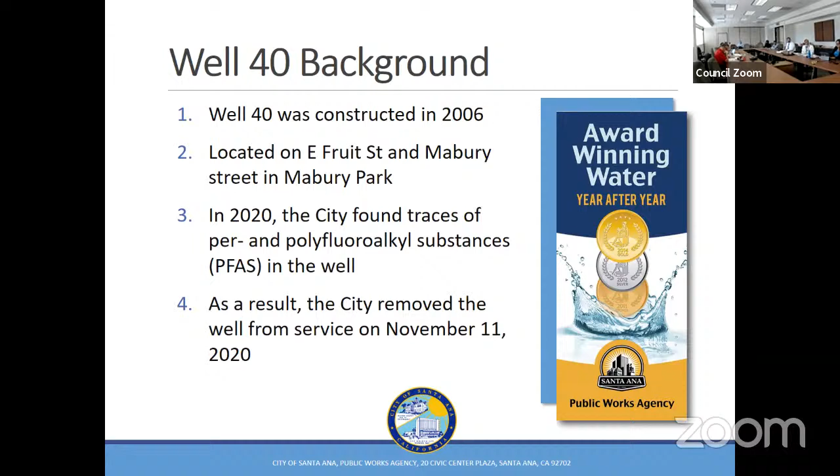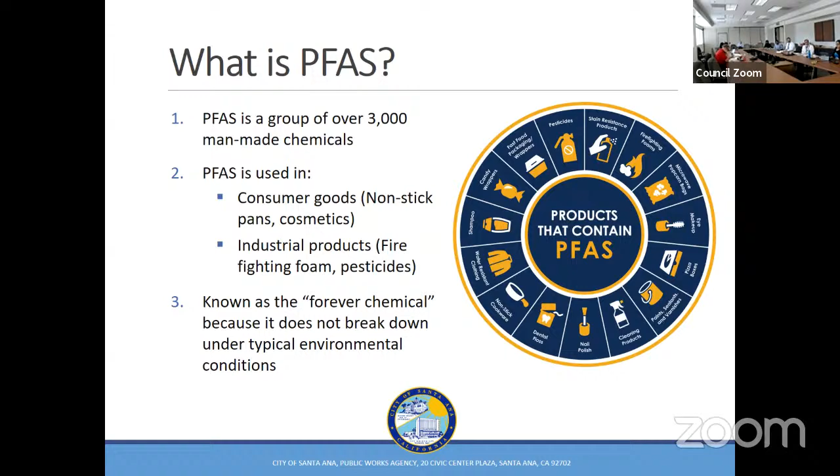So what is PFAS? PFAS is a group of over 3,000 man-made chemicals. It's often used in consumer goods like nonstick pans and cosmetics. There are also industrial products that contain PFAS, like firefighting foam and pesticides. PFAS is known as the forever chemical because it does not break down under typical environmental conditions.

Well 40 PFAS findings: the city has been reliant on imported water to feed the upper zone well where Well 40 is located. Because we took Well 40 offline, we still have to provide water to the people, and so our imported water sources in that zone, specifically MWD connection SA6, is being used to feed that zone. The city is collaborating with Orange County Water District to remove PFAS from the well by designing and constructing a wellhead treatment facility. Construction for this facility has commenced in May.

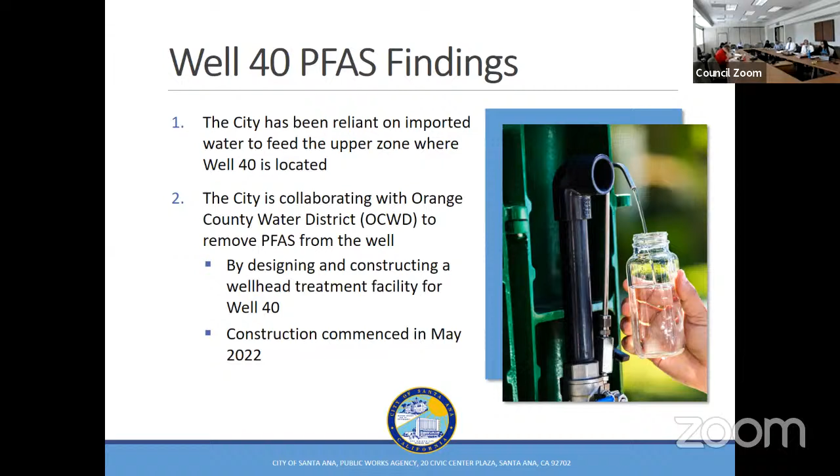Here is the construction schedule currently in place. Our design was completed in 2021. An award for the project was received in February, and so we began construction in May, and we hope to complete the project by December 2022 or February 2023 at the latest. The total cost, which will be funded entirely by OCWD, is $3.4 million.

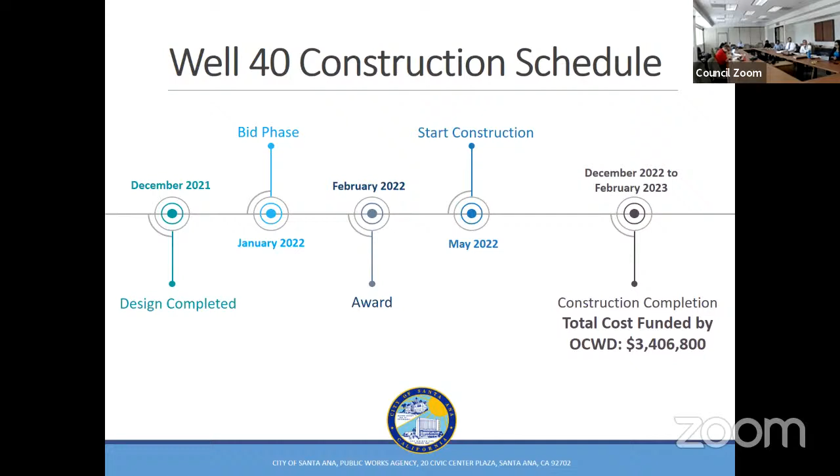So the treatment facility construction - what are we doing to get rid of PFAS in the water? We will be utilizing a state-of-the-art ion exchange system to remove the PFAS from the water. In addition, we will also be increasing site security, improving the lighting at the park, and installing surveillance cameras, as well as a perimeter wall and a gated entrance. We will also be including community outreach and educational opportunities, utilizing collaborative efforts between the Water Resources Division and Parks and Recreation.

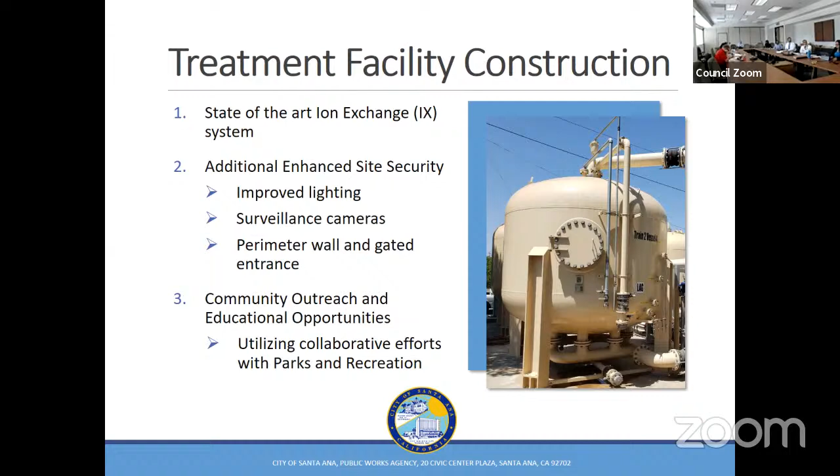So what are the benefits of the treatment facility? We will not only be removing PFAS, but potentially all constituents of concern - long chain PFAS, short chain PFAS, PFOA, PFOS, and so on. In addition, we will prevent reliance on imported water, thus saving on costs for consumers. OCWD will pay 100% of the capital costs for construction of the facility, will be instrumental in providing community outreach, environmental review, and construction, and will also be supplying 50% of the cost of operation and maintenance for the facility for 30 years.

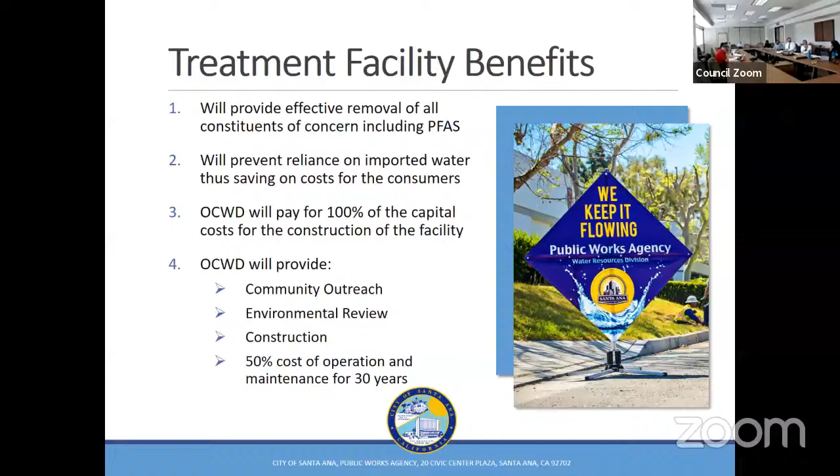This is the general location of the site, in Mabury Park. This shows a closer view of Well 40 and where it currently is. At the top, right next to the parking stalls, is where we will be installing the PFAS treatment facility.

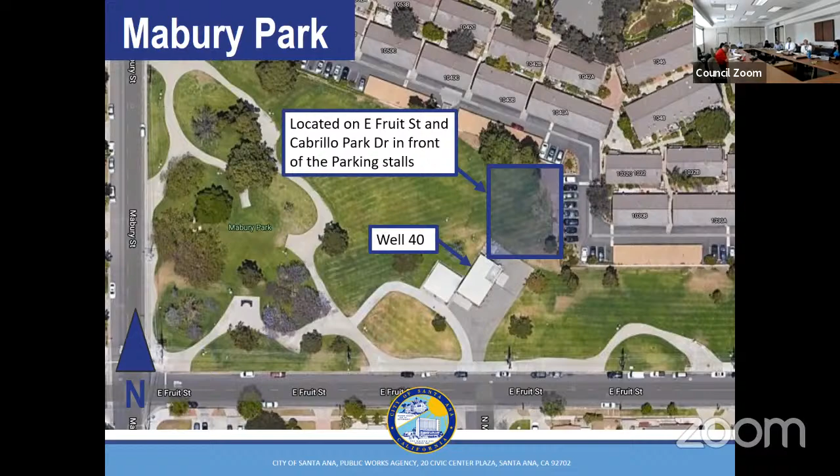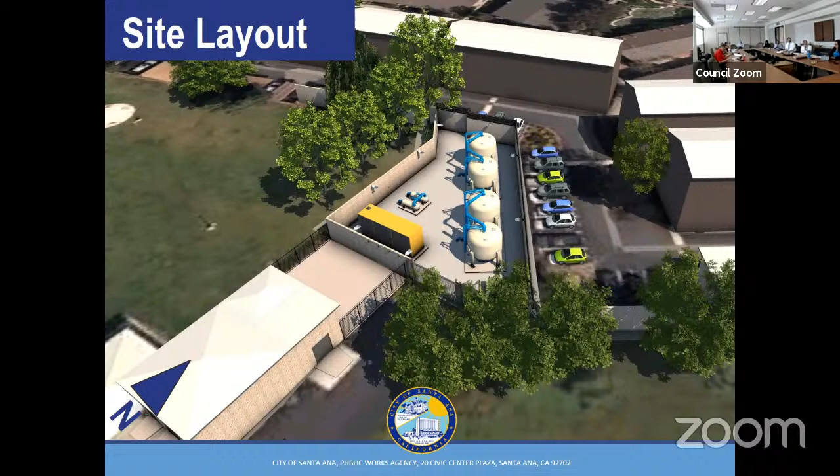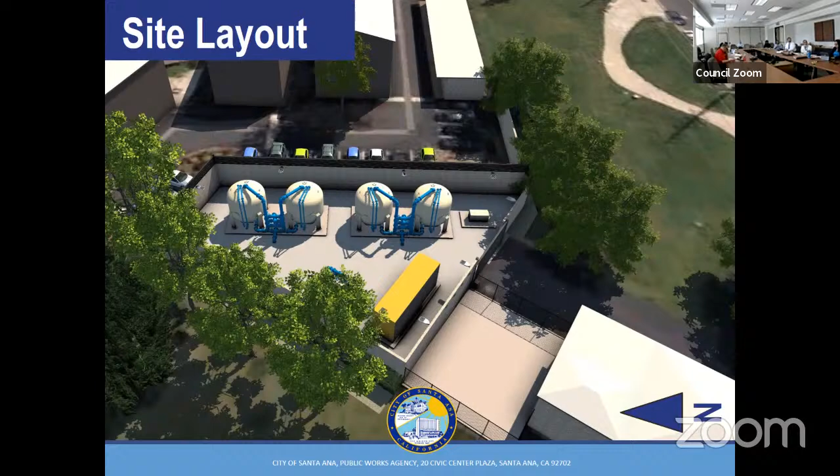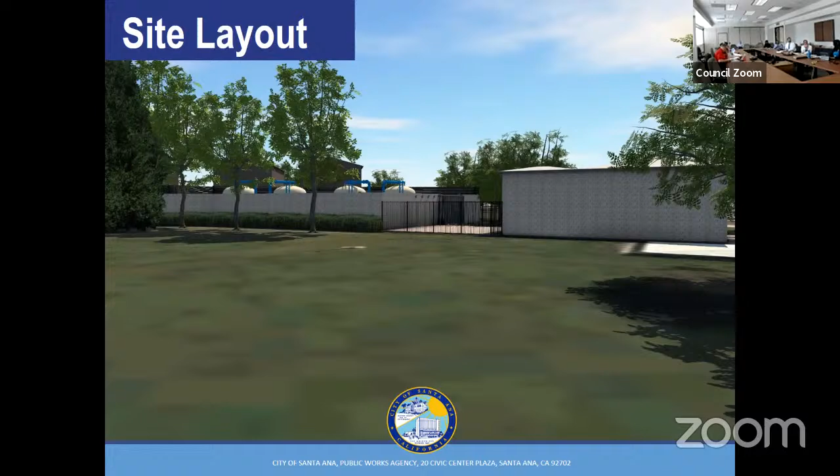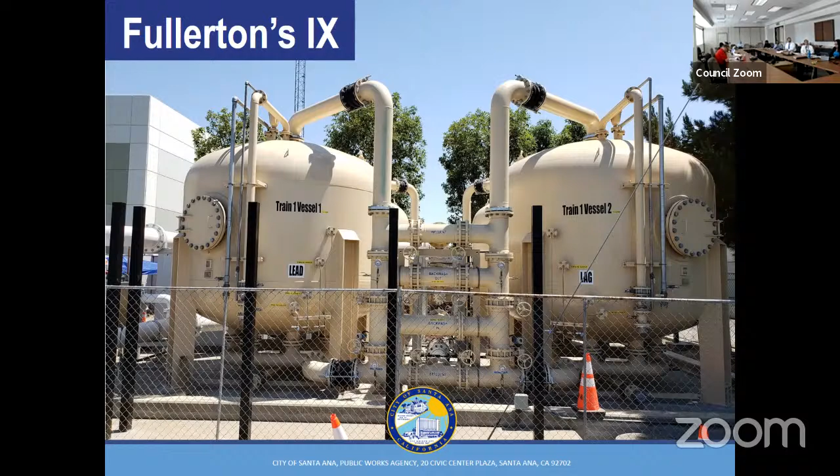That concludes the presentation. I would like to open it up for any questions, if we have any.

This is Commissioner Benninger. On the last picture, I find it very interesting that they used the word 'lead' talking about the import. It's lead. Pardon? It's lead, it's lead. I read that as lead, I'm sorry - that's my Polish background, thank you. Yeah, so one of the tanks serves as a lead and then the other one serves as a lag.

What is the life of one of these tanks? How long does it take to contaminate? As far as ion exchange, this is new to us - the first one in Orange County is the Fullerton one that is installed. What we're hearing right now is about 9 months before we have to change the resin on these vessels, until they reach breakthrough, that's when we have to replace it. But we don't have that expertise yet, or clear knowledge of how long it's going to take, because it depends on volume too - how much volume you move from the water that you pump, and also the water quality you might have at this particular site.

Next question is, how do they believe the contamination got into the water table? How did the contamination get into the water table?

Correct, well, it's percolation. So those industries that are the contaminant sources, one of them is 3M, in the upper riverside area, dump into the river, and those waters percolate until they made it to a basin here in Orange County. That's the information we have on how these chemicals got into our system.

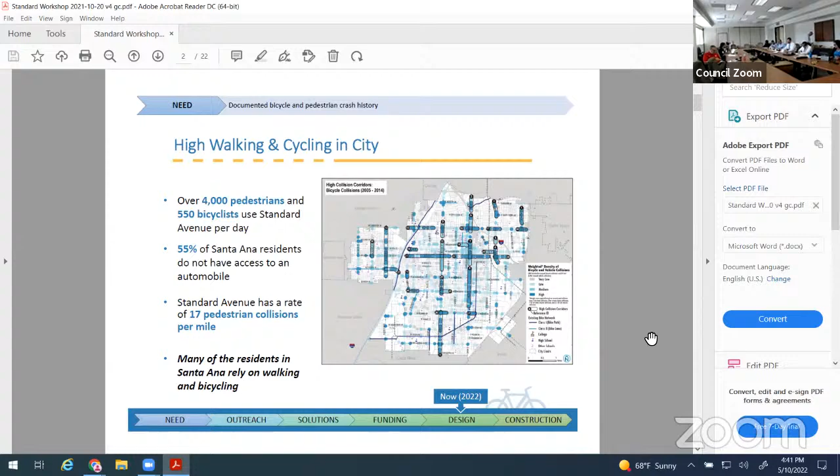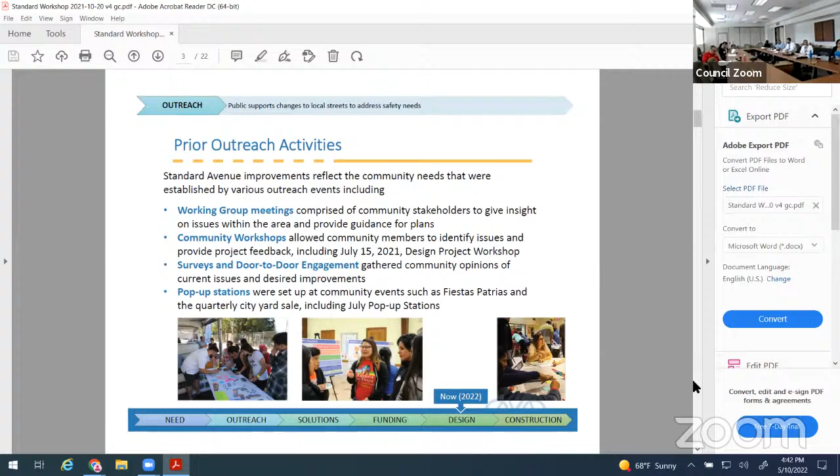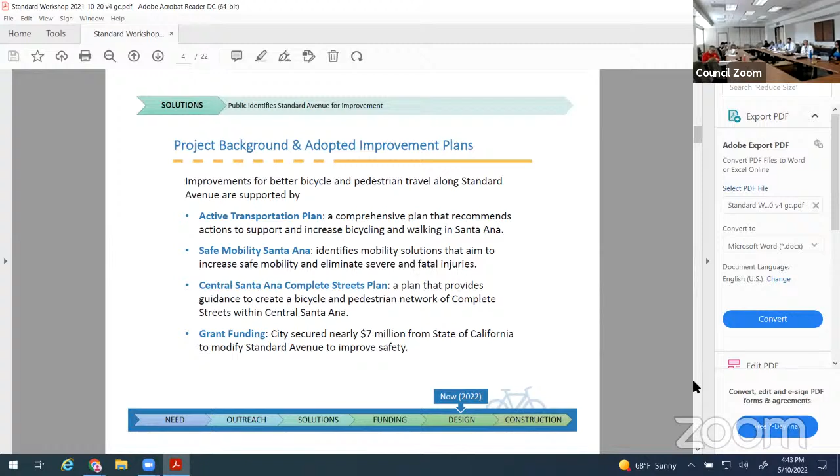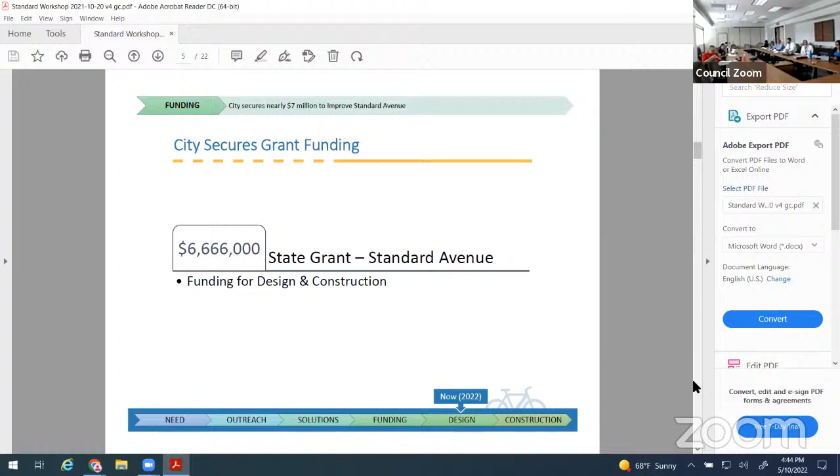The city secured $6.6 million in funding for the design and construction of this project.

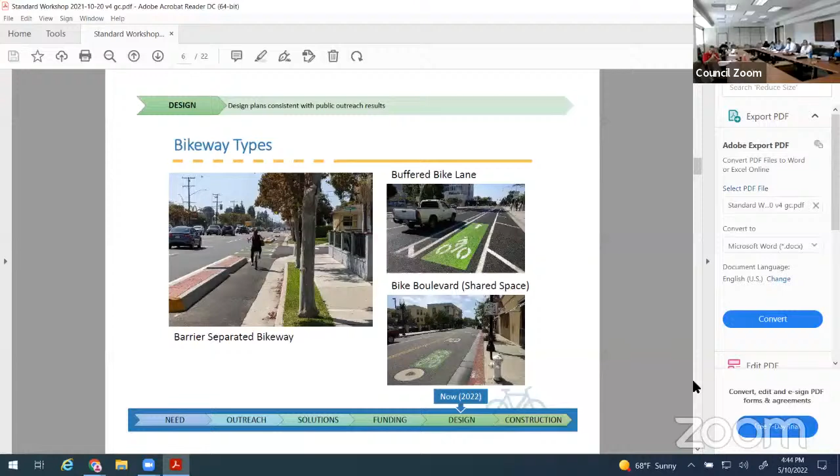I'm going to identify three bikeway types that we will be using on Standard Avenue. The first one on the left is our barrier-separated bikeway. The top one is a buffered bike lane, and the third one is a bike boulevard, which we call the shared space.

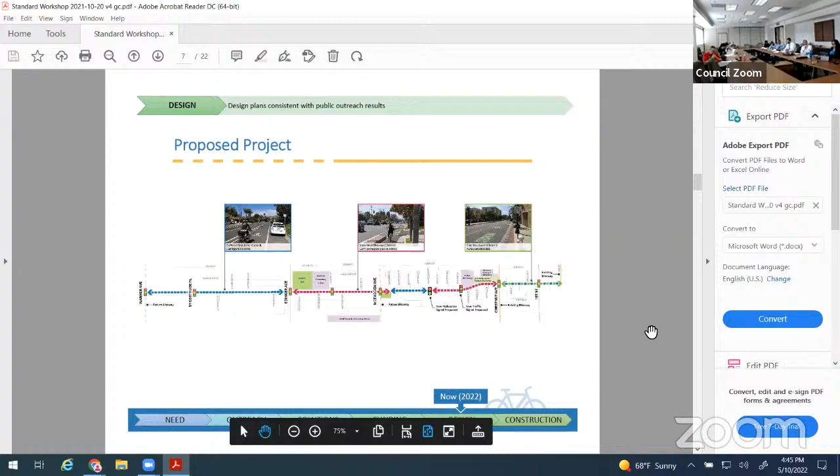The proposed project limits on Standard Avenue are from Warner to 3rd Street. The blue line shows our buffered bike lane from Warner to Edinger, and from Edinger to McFadden we'll have a barrier separating the cars from bicyclists. Between McFadden and Wakeham, we'll go back to the buffer bike lane, and from Wakeham to Chestnut, we'll go with the barrier-separated area. North of Chestnut to 3rd Street will be our bike boulevard, which we call a shared lane.

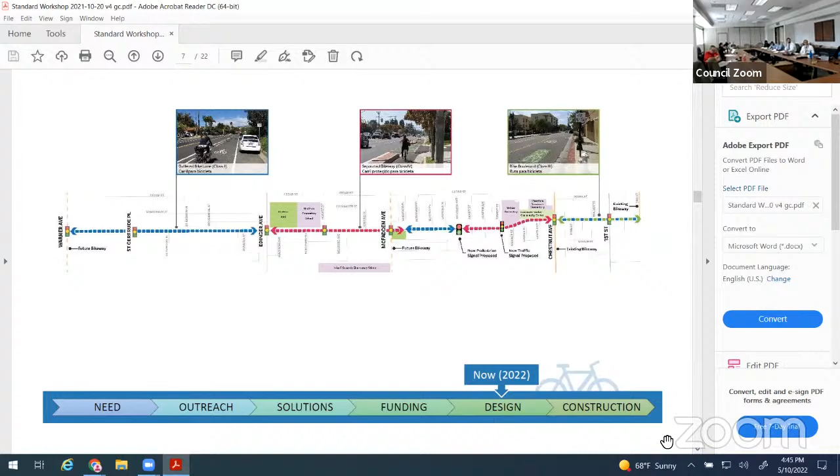Standard Avenue from Warner Avenue to Edinger - we have a rendering from our consultant showing the existing condition on Standard Avenue from Warner to Edinger.

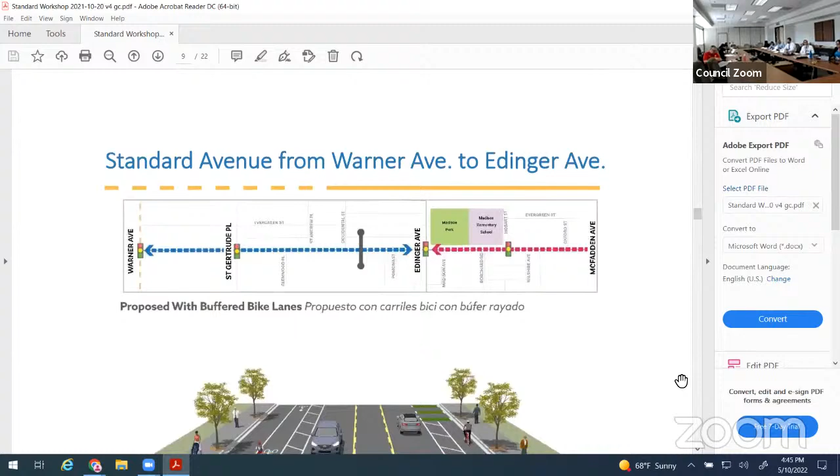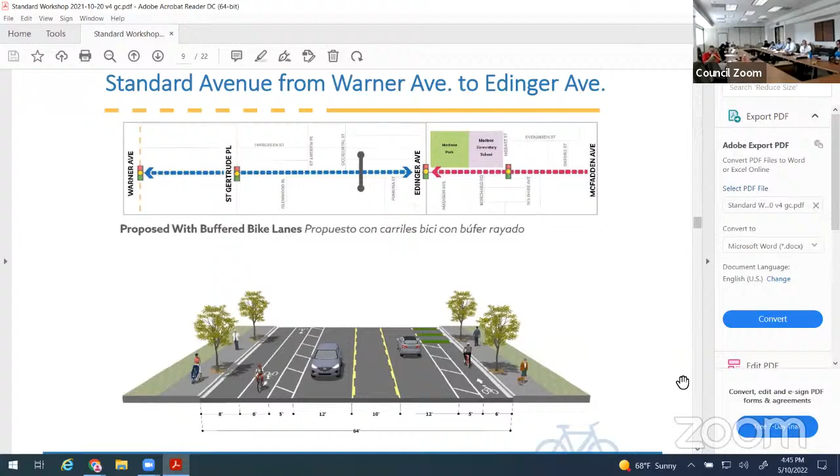Our proposed design for this section of Standard from Warner to Edinger is a buffered bike lane. It was a four-lane road, with two lanes north and south direction for vehicles, and we'll have that buffer bike lane there.

Standard Avenue from Edinger to McFadden is exactly the same right now - a four-lane road. The proposed design from Edinger to McFadden is a median-separated bikeway, with a 6-foot bike lane and a raised buffer between bicyclists and vehicles, with some on-street parking in this section.

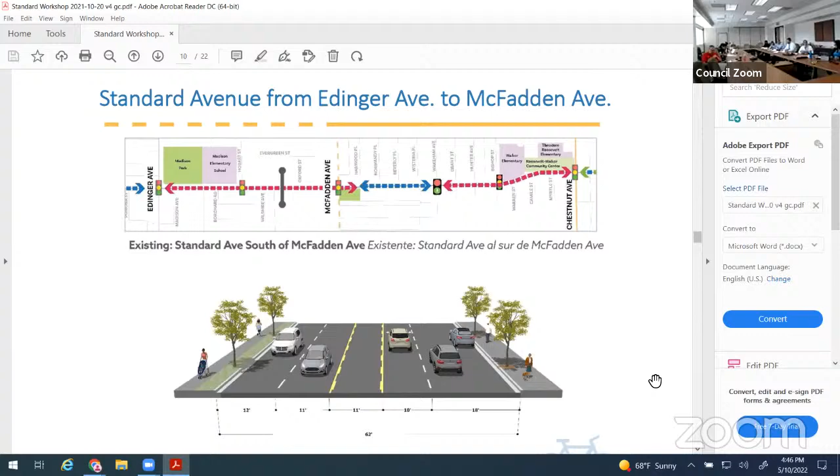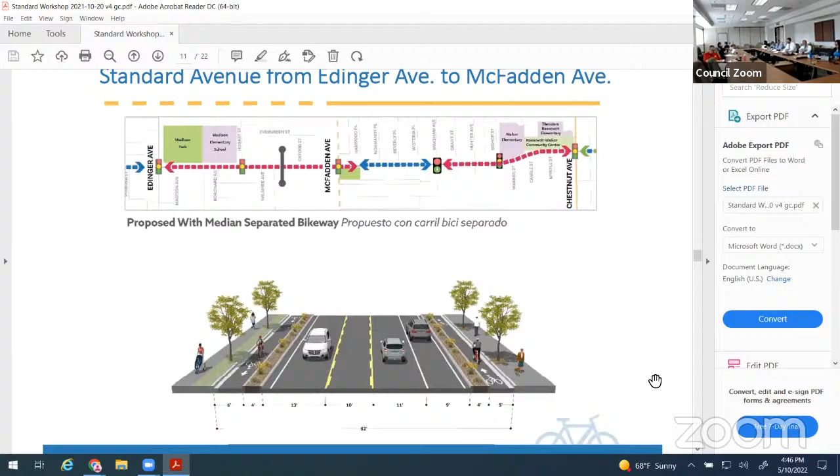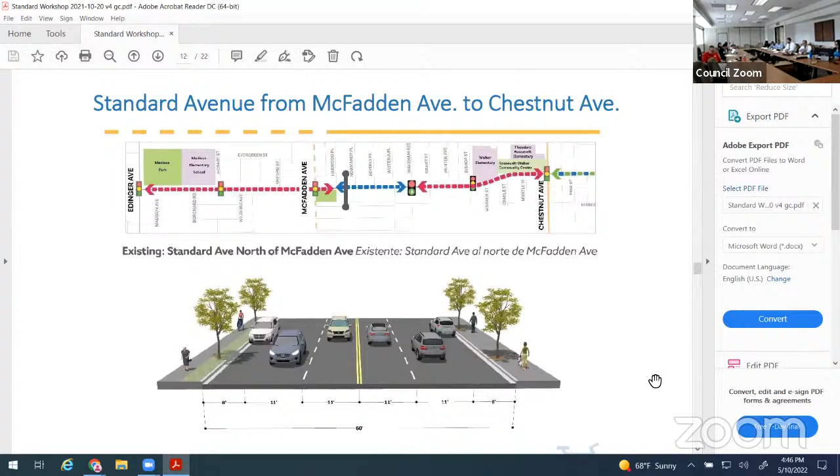Standard Avenue from McFadden to Chestnut is existing as a four-lane for vehicles. The proposed design is a buffer bike lane between McFadden and Chestnut, with north and south directions, some on-street parking, and the buffer bike lanes.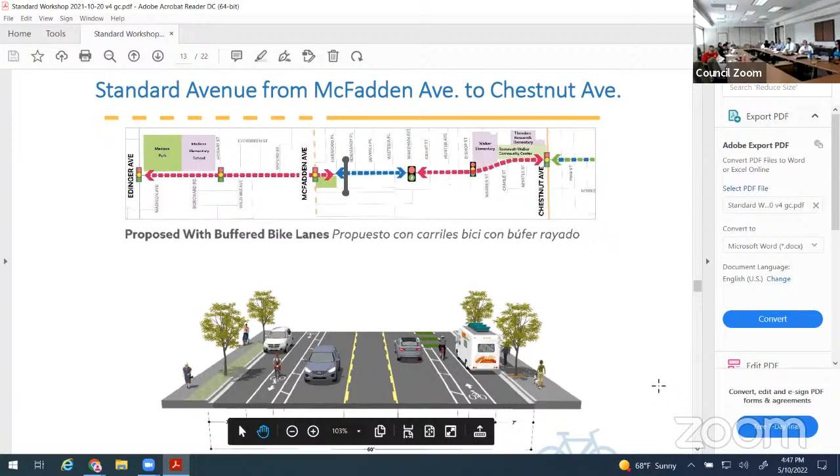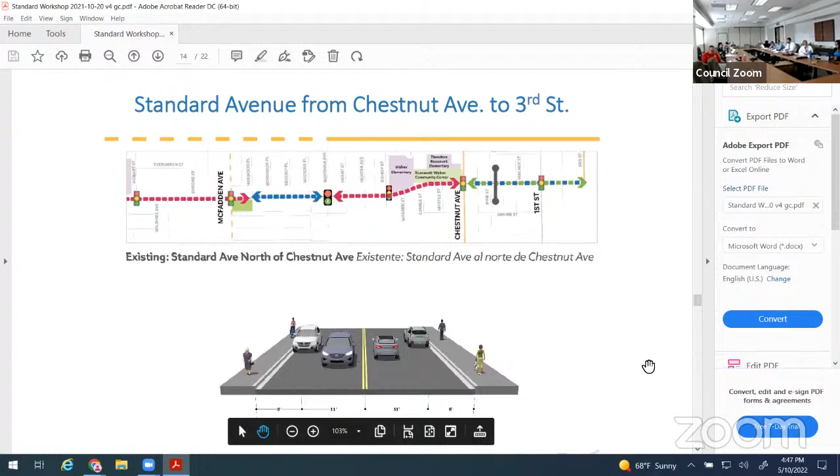Standard Avenue from Chestnut to 3rd is the existing condition, with two-way traffic there. The proposed bike lane route from Chestnut Avenue to 3rd Street will be a shared lane southbound, and going northbound will be a buffered bike lane.

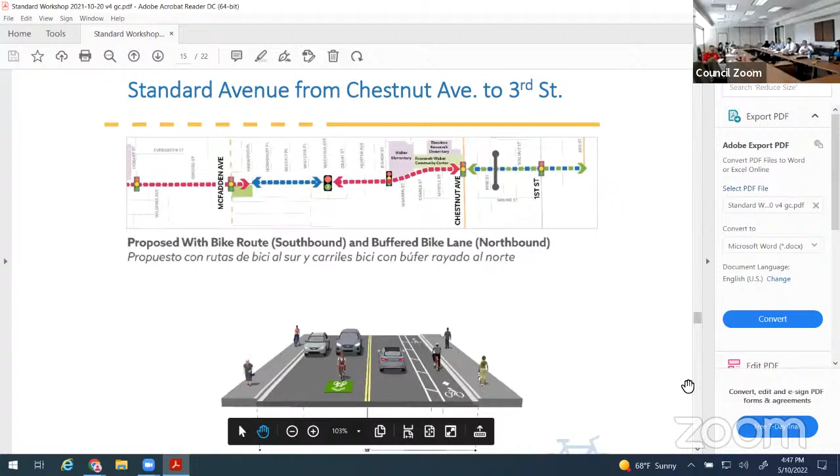Based on the design the consultant provided, we were concerned about parking, but we ended up moving things around and additionally gained some spaces between these segments. Just north of Chestnut to 3rd, the right-of-way is pretty tight, so due to sight distance issues we ended up losing 1 to 3 spaces of parking.

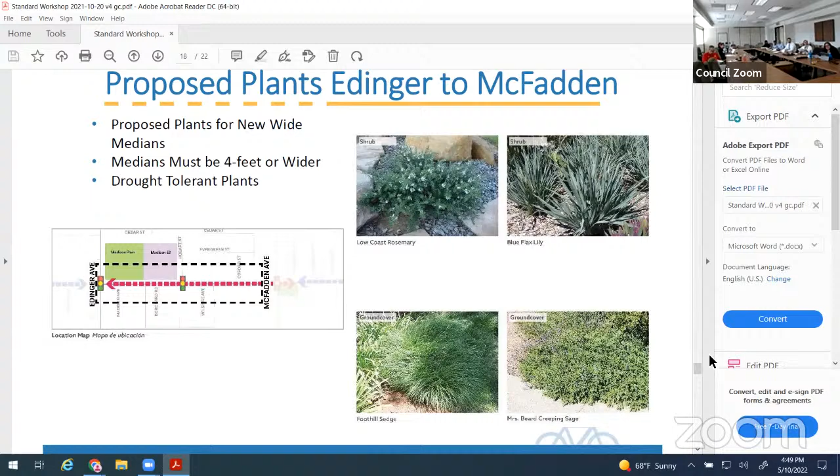Your hand is raised, my apologies. My audio went a little haywire for a second, but it may have been something on my end. It seems to be corrected now. No, my audio went crazy too. It seemed to have lasted maybe a minute. I'm not sure what it was, but it seems to have cleared up now. So I'd like to continue.

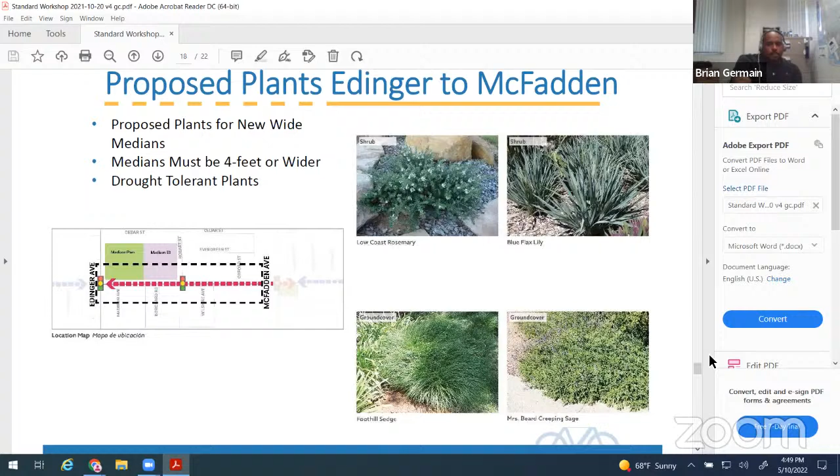The proposed plant palette for Wakeham to Chestnut - these are the plants that, again, through our pop-up events and community outreach meetings, the residents selected to implement on this project.

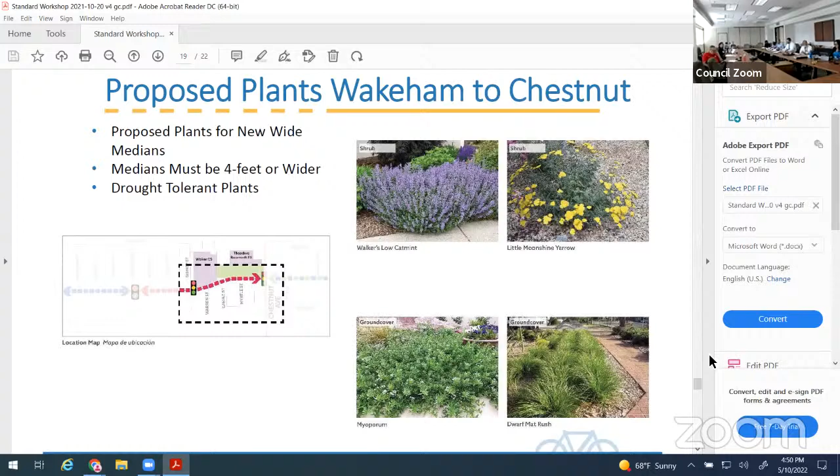Our project benefits on the design for Standard Avenue are to increase safe mobility to downtown and 4 schools along Standard, 4 parks and neighborhoods, with new pedestrian crossings at Wakeham and Bishop. Bishop is getting a new traffic signal modification. We'll also add curb extensions and bulb outs at certain intersections to shorten pedestrian crossings, especially near schools.

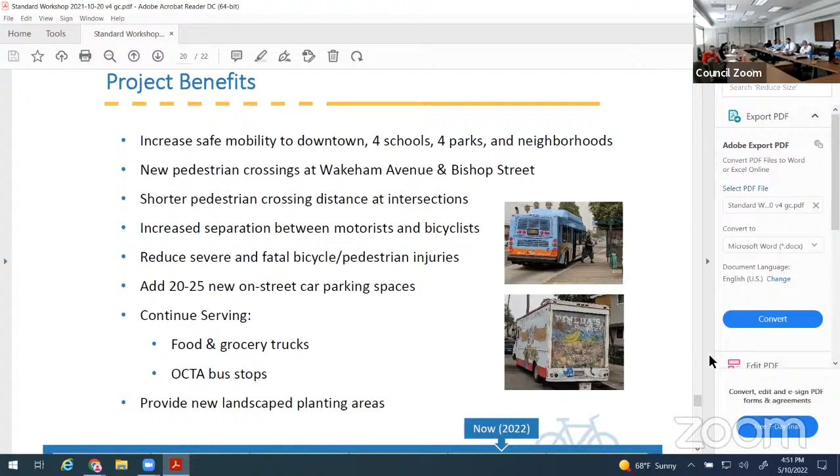We'll increase separation between motorists and bicyclists, hoping to reduce severe and fatal bicycle and pedestrian injuries. We're also adding about 20 to 25 new on-street car parking spaces. The community pushed to keep the food trucks between McFadden and Chestnut, since a lot of residents use them, so we kept those. We'll maintain all the OCTA bus stops along the corridor and provide new landscaping and planting.

Next slide. Here's our project schedule and where we're at right now. Our preliminary engineering was back in 2021, and design engineering started in summer 2021. We hope to finish all the design by winter of this year. Then we'll go to ATP to request construction funding, with plans to start construction in April 2023.

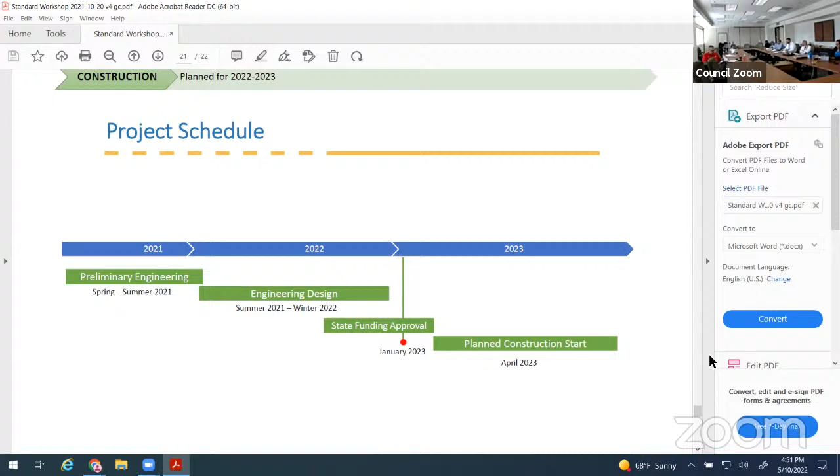And that concludes the meeting. Any questions?

This is Commissioner Walker. When you study pedestrian crosswalks, have you looked into— I'm sorry, I'd like to interrupt, I can't understand what you're saying. If you'd like to move to a different chair and take the microphone with you, you're welcome to do that if you feel comfortable.

Is that better? Much better, thank you. Of course. In front of my street, car racing has been a big issue—it even took out a whole light pole that's going to have to come down and be reinstalled. I was wondering if the studies also looked at other ways to remediate things like street racing, putting in more speed bumps, and possibly looking at crosswalks. I've known a few people who've had accidents and been hit by cars in crosswalks by schools.

We'll direct that to our traffic engineer. Okay, I'm Zach Kula, principal engineer for the traffic engineering section. This specific study looked more at the bicycle components and safety. The request for crosswalks was evaluated, and some are being added or enhanced. Even the crossings Gilbert mentioned—just by narrowing the crossing, it improves pedestrian safety, making it easier for people to cross because it's a shorter distance with less exposure while crossing the street.